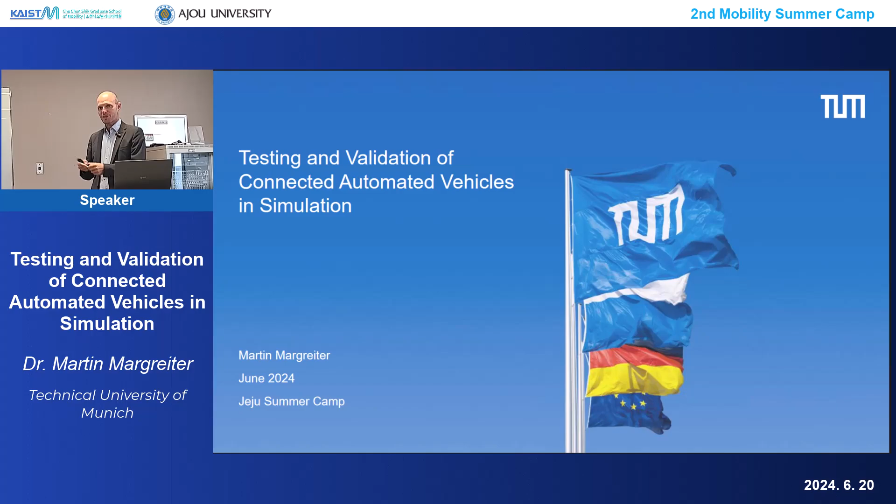And whenever you have questions, please always interrupt me. I know that Korean culture is more like being very serious about lectures and letting the professor talk. Please interrupt me whenever you need. Raise your hand or just say, Martin, please stop. Can you explain this once again? Or I have a question. That's not considered rude in Germany at all. We want to do it a little bit more interactive. So even if you're still tired from yesterday, just whenever you have some question, raise your hand or just interrupt me, please.

Okay, so first about myself. As you already have heard, my name is Martin. I'm from Germany. I'm heading a research group, or actually in the past heading several research groups, at the so-called Chair of Traffic Engineering and Control at the Technical University of Munich. We have a big research institute there with around 60 to 70 people, distributed into 3 different groups. 20 of the researchers are in my group, and my group at the moment has the name Test Fields and Simulations. That's why I'm here, to talk about simulation and test fields and explain to you what we do there.

And I also have founded a small startup, so this also fits a little bit to this camp, since your focus is also maybe to innovate and think about a new startup idea which you can create either here in Korea or somewhere else. So I've done the same already 7 or 8 years ago, founding a startup which is mostly dealing with mobility innovation as well. So we do lots of consultancy for OEMs, meaning automotive industry mostly, but also for tier 1 suppliers, so Bosch and Continental, you might have heard about them. They supply a lot of equipment, systems, and products for cars and vehicles in general, and we also support them with our engineering and simulation skills.

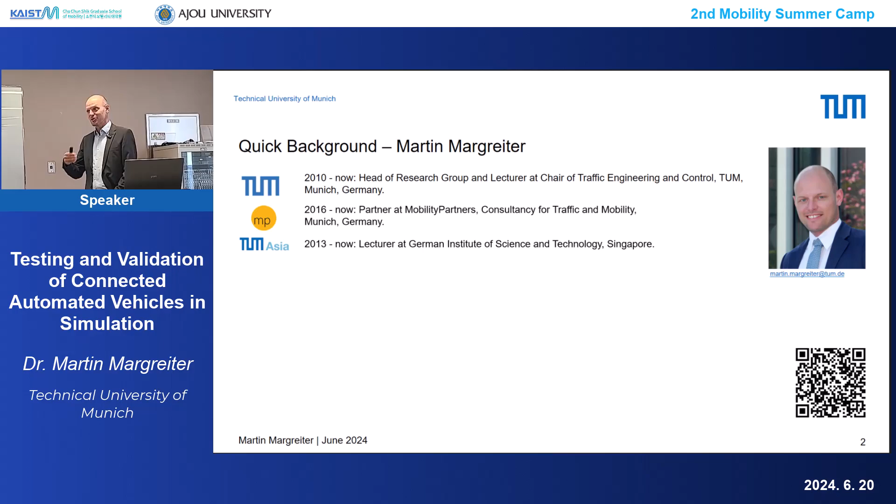Then also, for 11 or 12 years now, or the 12th time actually, I'm teaching in Singapore as well. Also some simulation classes there, mostly dealing with the simulation tool VisSim, which some of you might have heard about already. Who knows VisSim? Some, okay, the majority, great. So I'm teaching there how to use such microscopic traffic simulation for simulating traffic in Singapore.

Also, I'm part of PIARC, which is the World Road Association. Same like Jason, he's also now a member for Korea. I'm the delegate for Germany in one of the technical committees dealing with road network operation. And I was also for 2 to 3 years responsible for the European Commission, so that's like our government in Europe, to create for Central Europe an innovation hub. Which is maybe a little bit similar to what I think KAIST is doing here in this building. So also lectures, helping startups, funding startups, and also encouraging young people like you to found a startup in the mobility field to change the world to a better place, especially in the field of mobility and livable urban spaces.

Yes, I've been to the US also, same like Jason, to another university on a different coast.

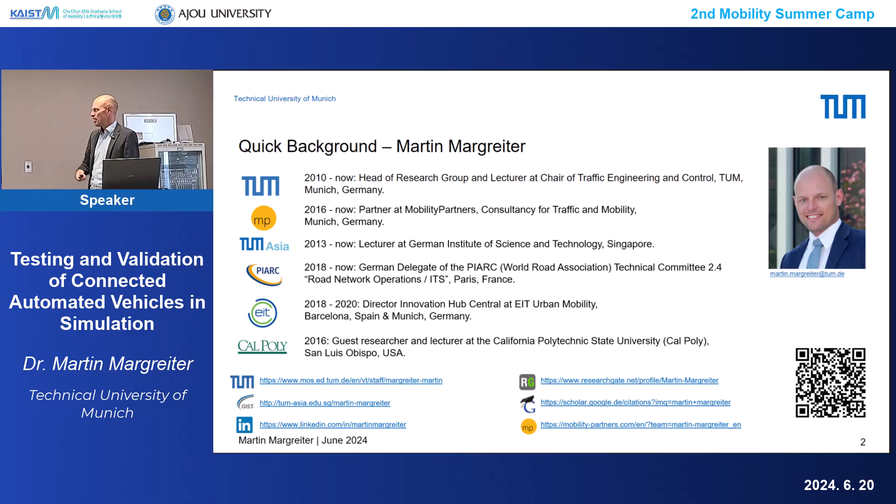All right, so what will I talk about? I will tell you what I will talk to you about today in more detail. First of all, I will do an introduction about the topic. So as you saw, the topic is about simulation, it's about connected automated vehicles, and it's about testing and validation. So I will try to tell you what these 3 elements exactly mean in the field of automated vehicles especially. And I will tell you why we actually need simulation to do that.

Then I will go a little bit deeper into the different details of simulation itself. So which scenarios are we talking about? So for example, urban scenarios, highway scenarios. We will talk about the different models which we are using. We'll talk about the coupling of the different models and different kinds of simulations. So we'll talk about driving simulators, for example, there, but also the coupling with, for example, digital twins of cities.

We will talk about verification versus validation. What's the difference and why do we need both of them? I will show you a little bit, since we are in the field of research, an outlook: what is the current state of research and what will happen in the next years as well with simulation.

And I will then have a short outlook into something which is very special about my research group, because we deal a lot with simulators. So simulators meaning humans, or people like you, sitting in some technical equipment, like a driving simulator, like a bicycle simulator, and we do some simulations with you as a human being part of a bigger simulation environment.

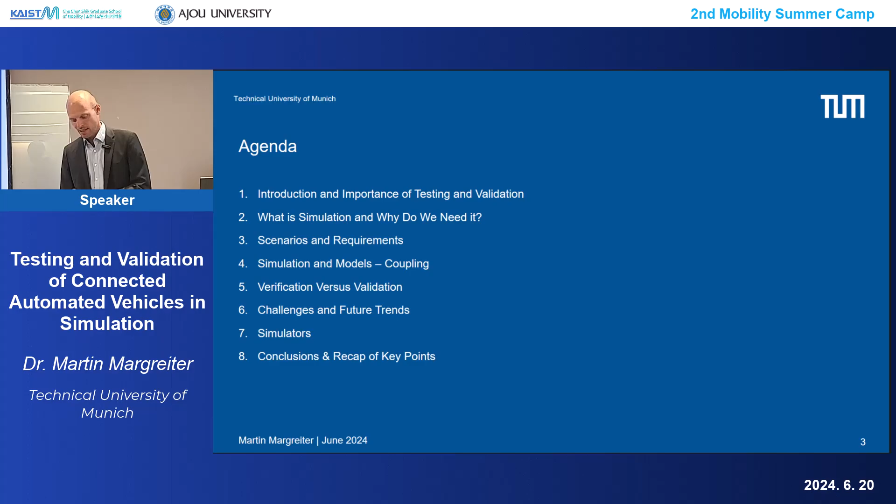So this is something my research group focused a lot on in the last years, and that's why I will show you some examples about the tools and systems and frameworks which we are using there. And at the end, we will finish with some conclusions. But first of all, I told you we want to define what the topic is actually about.

So Connected Automated Vehicles, CAV, that's the abbreviation. What does it stand for? So connected in this field mostly means it's connected to the environment. So it's connected to other vehicles. It's connected to the infrastructure, so traffic signals, maybe also a traffic management center, maybe also some cameras which were installed in the intersection or other sensors, to increase the safety by exchanging information with other participants in traffic.

So this typically happens via two different kinds of systems. The one is Wi-Fi. You all know that, consumer Wi-Fi. There's a special Wi-Fi for the automotive sector, which is called in Europe the ITS-G5. In US terms, it's very often referred to as DSRC, Dedicated Short Range Communication. So this is just a Wi-Fi which was optimized for the use in cars, which means that it can also operate while driving at higher speed, and it has longer ranges than the typical Wi-Fi you have in rooms or on your smartphone.

So we use this technology to enable the communication between different cars so that they can, for example, exchange information about hazards on the road, about maybe an emergency braking which they will activate in the next seconds or milliseconds. They can also exchange information about the traffic state, about maybe pedestrians or cyclists they have detected with their sensors, which other cars driving behind did not see yet, so exchanging safety-relevant information. Mostly, but it can also, of course, be used for infotainment or other information. So this is typically what is done nowadays.

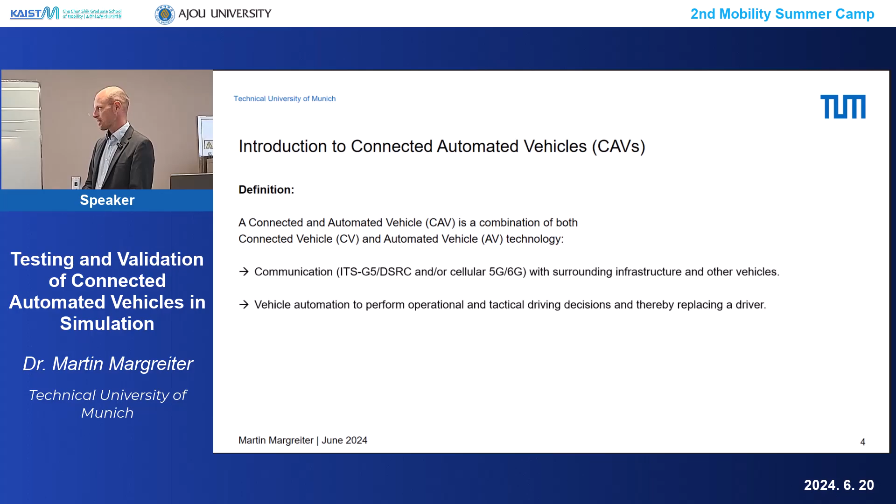And automation, of course, is a term which is used widely nowadays, especially in the field of traffic. Vehicle automation is mostly defined as the technology which is used to have a driverless car, simply spoken. So replacing the driver's activities in the operational, tactical, and strategic operation of a vehicle by algorithms which are fed with data from sensors and using a lot of computation power in the vehicle. So that's the definition of automation, as we call it here.

Very often the term autonomous vehicle is also used. We in research in Germany, or at least at TUM, try to avoid this term because autonomous, according to our definition, would mean no external information, no external influences. So fully autonomous without any interface to the outer world. And this is somehow neglecting the connected part here.

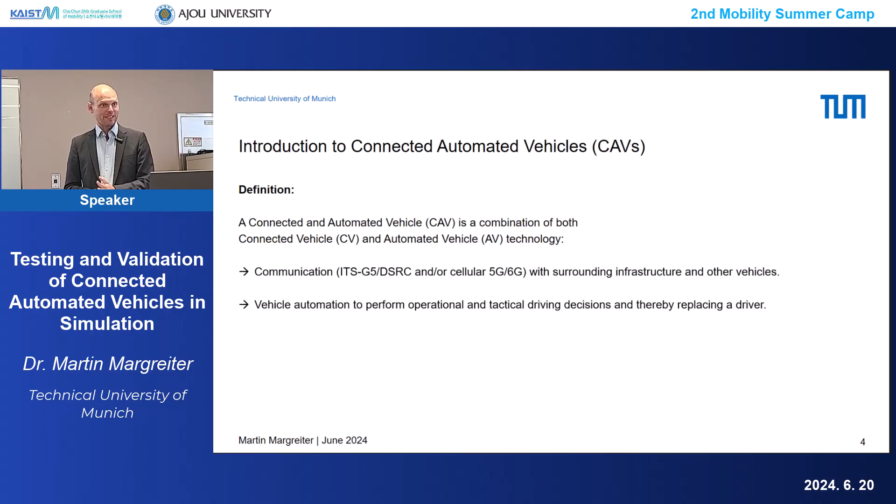Okay, so connected in our field means, again, receiving information from the environment, from the infrastructure, also from other vehicles. So according to our definition, this would not make an autonomous vehicle autonomous. Therefore, whenever we talk about driverless vehicles, we use the term automated vehicles, or fully automated, or highly automated, just for the definition of the terms here. So that's connected automated vehicles. We will talk about that today, and we will talk about some examples also. So I will show you later something which I've brought here on the left-hand side.

I think some of you might have joined us to Munich. Some here in the room might have seen our automated rickshaw, which is a 3-wheeled vehicle, very light vehicle. I'm actually not sure how much it weighs at the moment. It always depends on which computation power and sensors we install, but it's something like between 120 to 190 kilos. So very lightweight vehicle. We can actually carry it with 3 people, easily, or not easily, but we can carry it.

We also have nowadays on Munich streets, and especially in the north of Germany, also Moia operating. This is a brand from Volkswagen, from VW, which is operating such autonomous shuttle buses. We have automated trucks, we have automated people movers. So all these are examples for automated vehicles.

Who has ever driven an automated vehicle? Or who was ever passenger in an automated vehicle here? Not many. I'm not so sure. I actually wanted to check it yesterday. The Seoul metro is not automated? The metro in Seoul? Some of the metro lines. Yeah, I think all of you have driven automated vehicles already. I didn't put the metro here, but this is also an example for an automated vehicle. And the others, they have driven automated people movers like that, I guess, right? Like small shuttle buses. Yeah, that's a typical showcase nowadays.

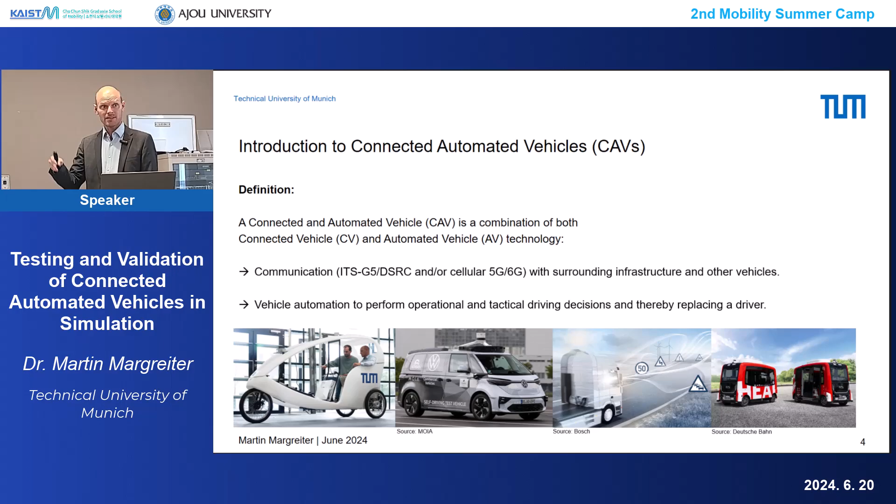So whenever we talk about automated vehicles, typically we think about automated cars. But of course, there's also automated trains, automated tram lines on the road, automated 3-wheeled vehicles, maybe automated small logistics robots or parcel delivery robots. Maybe also automated drones. I will not talk about that. But there's lots of kinds of automated vehicles, and especially when you think about public transport, metros, maybe also bigger buses in the future, we will see quite a step in automation there in the next years.

Therefore, since they will be part of our future sooner or later, it's very important that we test and validate them. So what does that actually mean? I brought you a lot of examples why we need to test connected and automated vehicles. So first of all, of course, safety. That's the main reason why we already do testing of regular manually driven vehicles, to test if they're safe for operation and safe for the humans using them, but also safe for the humans in the surrounding of these vehicles, pedestrians, for example. So that's a very important part also for the testing and validation of automated vehicles.

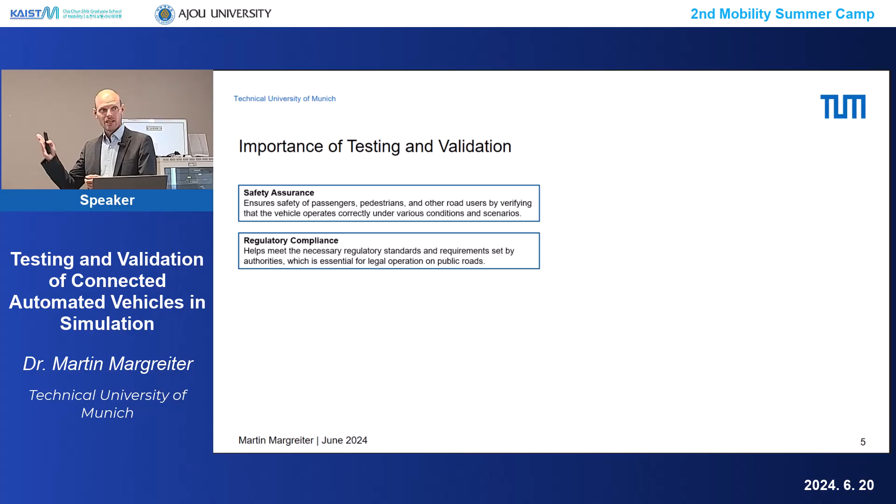Then, regulatory compliance. Lots of authorities worldwide have already established the first rules, the first laws, the first descriptions, technical specifications about how automated vehicles should be equipped and how they should operate. So to fulfill these regulatory frameworks, it's a very important part in our testing procedures that we test according to these frameworks.

And of course, error detection. In the development of such vehicles, we will definitely make lots of errors. It's probably hundreds of millions of lines of code which end up in such a vehicle. So you can imagine there's lots of potential error sources. Therefore, to detect and correct these errors during the development process of such vehicles or of such algorithms is a very important task.

Cybersecurity. You probably have seen some documentaries or read some news articles about automated vehicles or regular vehicles which got hacked. So cybersecurity is really an issue, because if the vehicle has the possibility to drive, to accelerate, to stop on its own, and this is all happening via algorithms, and these algorithms might be vulnerable to cyber attacks, this is a big risk for the passengers in such a vehicle. So this also plays an important role.

Interoperability. So we need to test and validate: are the vehicles actually able to work together? Can a Toyota and a Mercedes car actually work together on the road? Can they also, as I mentioned before, be connected, exchanging information about other vehicles in the surrounding, about hazards on the road? So they need to be able to communicate with each other. They also need to be able to communicate with the infrastructure in the city of Munich, but also on the island of Jeju. So they need to follow certain standards to work together as a whole. This is also a very important factor.

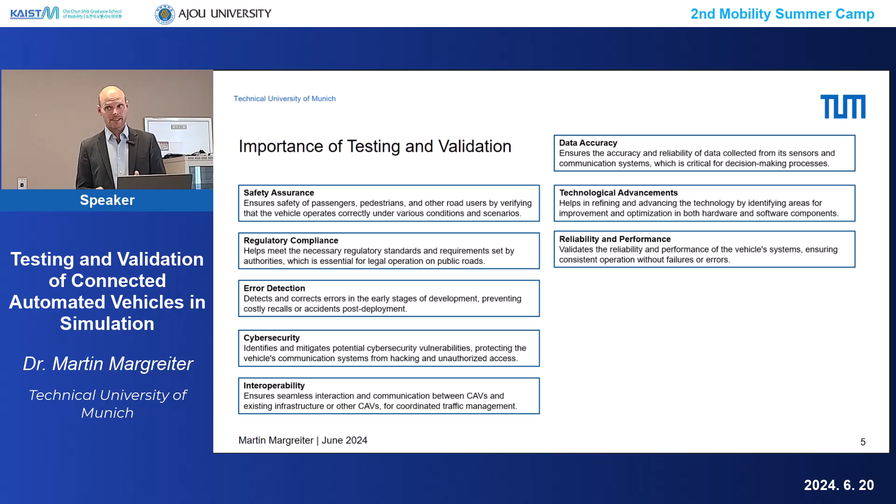That's also something which typically is not done by the car makers. They don't care so much about, is it really efficient in the overall system? Is the city mobility system getting better? That's the task of us researchers, for example, by microscopic traffic simulation, to validate if they really bring a positive impact on sustainability, so less fuel consumption, for example, but also efficiency of the transport network, less congestion, less travel times, and the same for safety, less accidents, less dangerous situations, or at least reducing the severity of an accident via smart systems.

Yes, I think this is all quite clear. Also edge cases we have to test. And more important at the end is consumer confidence. So I'm not so sure how it is here in Korea, but in Germany nowadays, when you talk about automated vehicles, the first thing you hear from the people who are not working in the field is, I don't trust that, it's not safe. Because we did have some examples.

I mean, you heard about crashes of automated vehicles, I guess, in the US, where they're already operating on the streets in bigger scales. People are getting injured. Some even have some fatalities involving automated vehicles. I mean, there are very few, especially in comparison to what we have with human involvement. But still, this has a big impact on the consumer confidence that this is a safe and good idea in the future to transform our mobility system towards this direction.

So therefore, to see if the consumer, so the passenger at the end, actually feels confident in using such a vehicle, this is also a very important part of testing and validation. Not just if he feels comfortable inside in terms of the environment in the vehicle and the nice seat and whatever, but if he feels safe. That's also very important, and we do this by showing the passengers in test fields and test beds, first of all, how it is to be driven in such a vehicle, but also how it is to interact with such a vehicle.

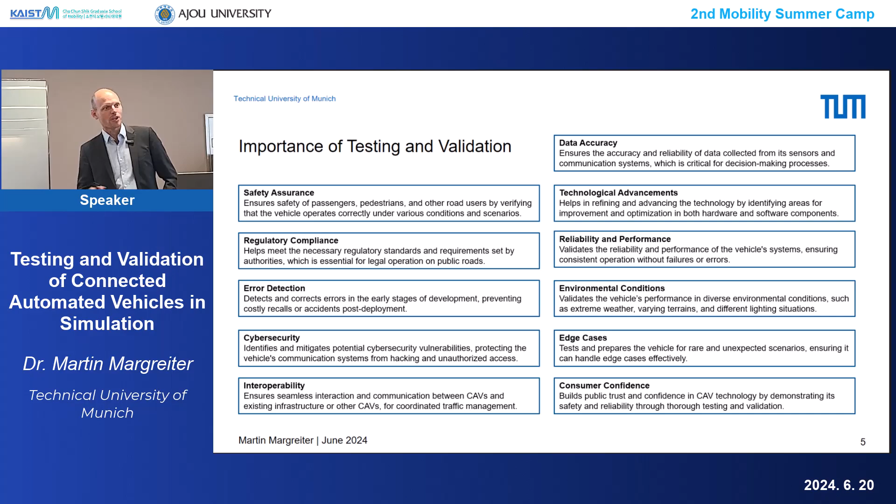So on the roads, if you're a pedestrian, can you really feel safe if you, for example, walk on a sidewalk or on a pedestrian crossing and the vehicle is suddenly approaching? So we show this to the people by bringing these vehicles on the road and testing them also on public roads. This I will talk to you about in the second lecture. So that was lots of theory. Let me explain to you how we typically do that in practice.

So typically what we do, we have 5 different areas where we look into how vehicles operate and what their effects are.

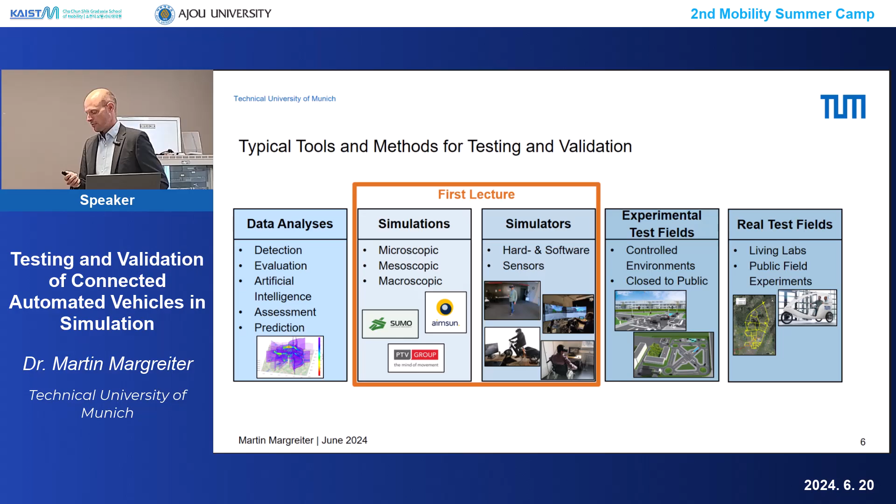And we will talk in the first lecture mostly about simulations and simulators. And then in the second lecture, which will follow afterwards, oops, sorry for that, we will talk about the right part of this process chain, where we will talk about how we actually bring those vehicles to the street.

But first of all, simulation. Why do we actually use simulation? This is valid not only for testing of automated vehicles, but in general, why does simulation make sense? First of all, as I've already told you, the more left we are on this process chain, it's easier, it's simpler, and it's cheaper. You already have equipment in front of you, your notebook, your laptop, where you can just do simulation. You download the software. Some of them are even open source and free. So it's very simple to do that.

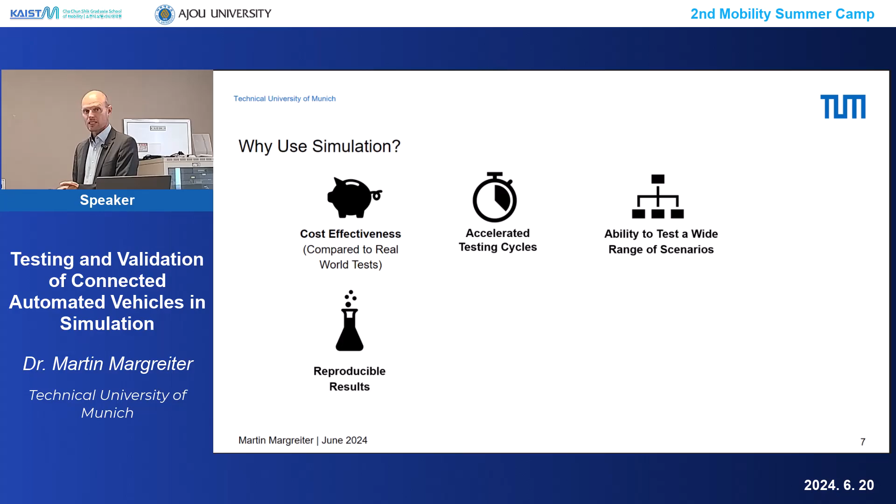And typically, we also do that to save time, to accelerate testing cycles; that's a big plus for simulations. And we use it to test a huge amount of scenarios, which I will show you later. We can have reproducible results, meaning that if we found some errors and want to try it again afterwards, we just simulate it again under the same environments, because in a simulation we control all the boundary conditions. This is a big plus for simulation. And we have valid conditions which we can verify with reality, for example, by collecting data.

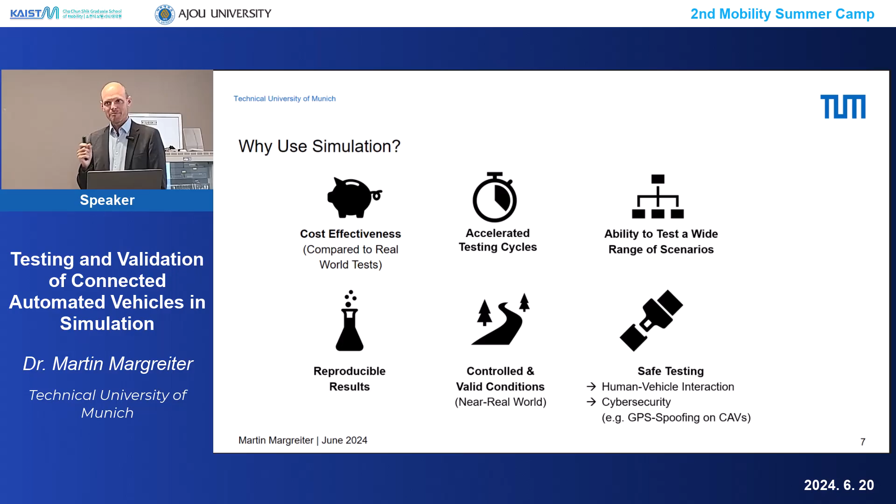And of course, especially when we talk about automated vehicles, we have a safe testing environment. If we have an accident, or even run over a pedestrian in simulation, well, that's bad for us because we have to invest more time, but it's not a problem in the end. If we would ever injure some person on the street with an automated vehicle, that would be really bad. So safe testing is, aside from cost effectiveness, probably the main reason why we use simulation nowadays.

And there are different kinds of simulations. Probably you've heard some of these names. For example, model in the loop. This means we have the model already developed and we test it in the simulation, so we run the model. The next step would be, for example, we have not just the model of an automated driving algorithm, but the real software. We got it from BMW, how they operate their vehicles, and we use this software in the loop. So we can test the real software on our computer. One more step is hardware in the loop.

So for example, we are using sensors, LiDAR sensors, real LiDAR sensors, which are connected then to our simulation. And for the LiDAR sensors, we fake the environment so that we see how the LiDAR sensor, the hardware, would actually work.

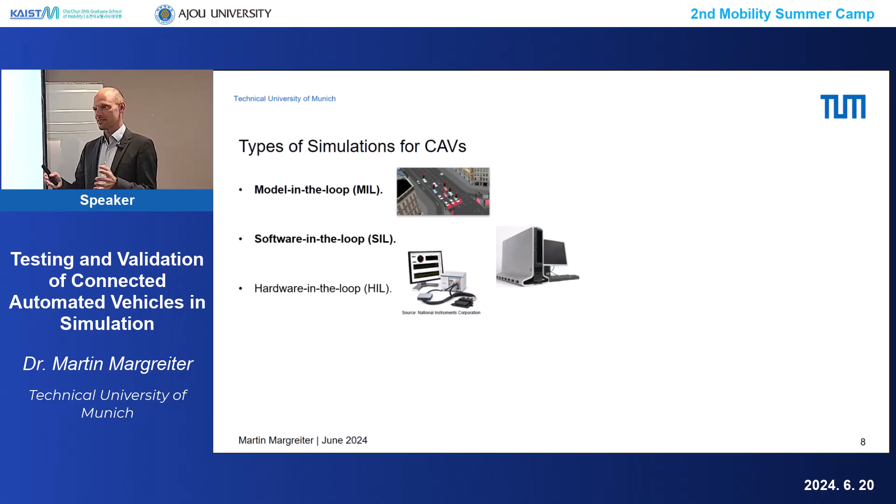Hardware in the loop is similar, for example, maybe for a driving simulator on a testing ground from the vehicle certification. So there also you have a vehicle which is driving on a test interface, but we really have the hardware operating like on a regular street, just in a testing facility. So this would be hardware in the loop.

And vehicle in the loop overall is then that the vehicle sensors, for example also the cameras, get a fake image in front of them on a screen. We bring a digital twin, for example, of the surroundings in front of the vehicle, so that the vehicle sensors think they are driving on a real test bed, but actually they are driving on such a vehicle stand.

And last but not least, something which was in the past very often called driver in the loop. Nowadays, since we talk also about automated vehicles, of course, it's not the driver anymore, so we are now trying to call this rather human in the loop. So somebody like you, a test person, coming to our lab and driving our simulators, this would be human in the loop testing. It's still a simulation, you are in a simulated world. You see on screens, for example, like here on a driving simulator, the virtual surroundings. And this is what we call human in the loop simulation.

So again, you see here from top to bottom the complexity increases when you go down, and of course also the costs and the time consumption of these simulation types increase when you go down. Yes, costs go up, and reality goes up. That's the big plus which you see here.

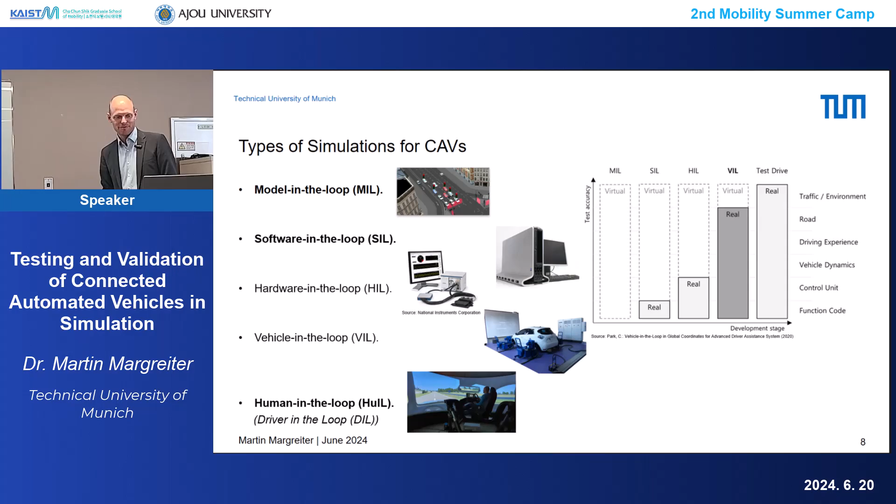So going into more detail, looking at the vehicle surroundings, the sensors, the algorithms. Typically Unity 3D, which is actually a game engine, is used quite a lot. CARLA, PreScan, ROS. So lots of tools there, and there are many more tools available on the market.

The domains in this field are really merging together. You will see we use game engines, we use software from computer science, we use lots of AI in our software nowadays, machine learning algorithms. So the domains are really merging together, and it's quite difficult to show you a chart of all the software used in this field, because it's changing rapidly every day.

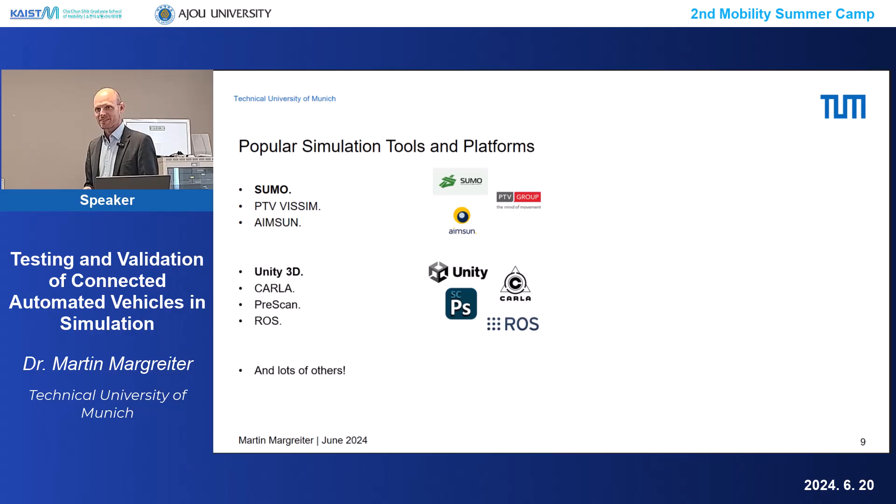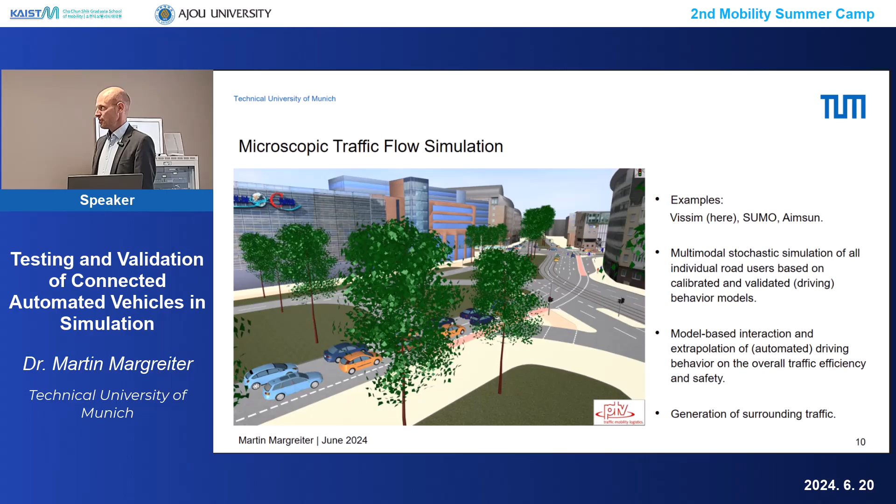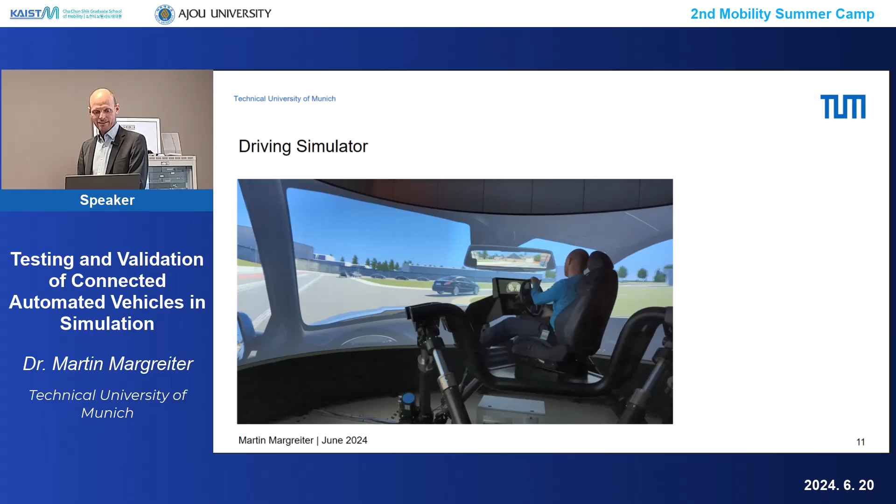If you go one step more detailed, that's what we call a driving simulator. A driving simulator means a human in the loop, somebody like you. I think this is even a video of me driving in a driving simulator, doing some illegal overtaking in the city. So this is a fully movable cabin where you drive a real vehicle, so the software is also from a real vehicle, in a simulated environment.

So these are the different kinds of worlds, I would say, which we have in the field of traffic and vehicle simulation. And you already see that nowadays they are very much overlapping, so it's not easy anymore to differentiate between them, because very often such simulations can also include many other vehicles. We can also have a driving simulator integrated in such a simulation, so you actually drive this vehicle in this simulation tool. So they become closer to each other, and the systems really are interoperable now.

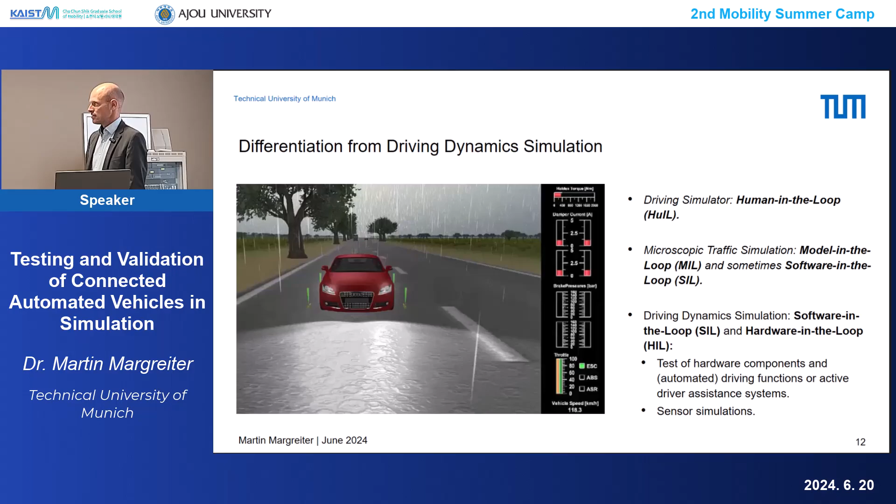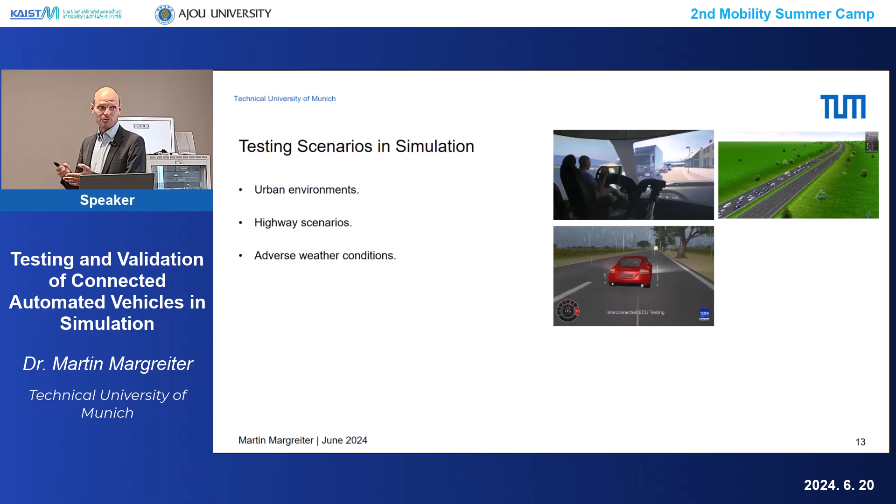So, here we go. And I already mentioned before, typically we test in lots of different scenarios. So for example, urban environments, highway scenarios, so freeways where we do have higher speeds and hopefully no pedestrians, no cyclists. We test adverse weather conditions like I showed you in the video before. And we also simulate complex traffic situations.

So for example, situations like construction sites, which are not so easy to identify sometimes for vehicles, or traffic situations like here, where it looks quite unorganized and where automated vehicles might have quite some problems to operate in a safe and efficient way. And we also have lots of research nowadays on the interaction between vehicles and the surrounding vulnerable road users, which is cyclists and pedestrians mostly.

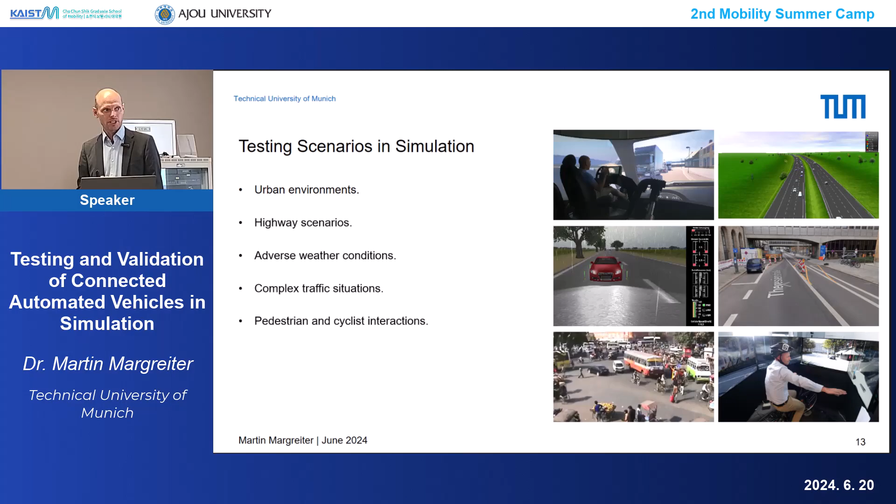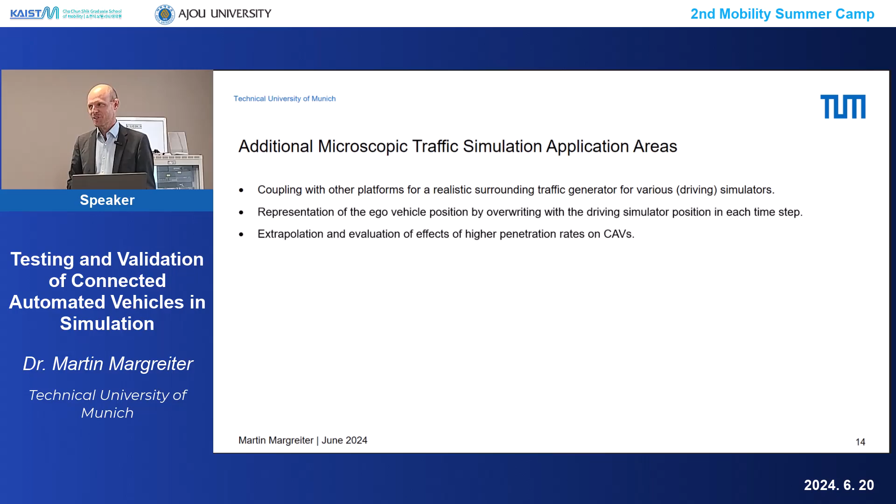So, what other areas do we have? I think I will just skip that a little bit because I think you have a lecture on simulation as well, right? I guess, so let me just skip that due to time reasons.

Okay. What is more important and what is really a main task in research at the moment is the 3D city models. So as you have seen before, all these simulations require that we know something about the environment where these simulations happen. The environment is typically our cities, or at least our transportation network. So therefore, our main task really is to bring these real world situations into our simulation models. This is, first of all, the first step you have to do, and second of all, typically also the most time-consuming step. So bringing the real world into some digital world, which is the surrounding afterwards for our simulation.

We typically call this a three-dimensional city model because nowadays the requirements of simulations are very often that we need the third dimension as well. So for microscopic traffic simulation, 2 dimensions, totally fine. For all the other simulations which I have shown you, the third dimension is a must. Because, for example, when you're driving in a driving simulator, you need to know where are obstacles I cannot look through, obstacles which are obstructing the view to other vehicles, to pedestrians and so on. So the third dimension is a must there.

And if you look into the field of automated driving, obstruction becomes even more important because the automated vehicle has to rely only on sensor data. LiDAR sensor, radar sensor, cameras, whatever. And those need not only the information about whether there is obstruction in front of them, but they need information about which material that is. Is it wood? Is it glass? Is it reflecting or not? Can I look through or not? So this is very important information for 3D city models to be implemented in simulation. And that requires a lot of work, you can imagine.

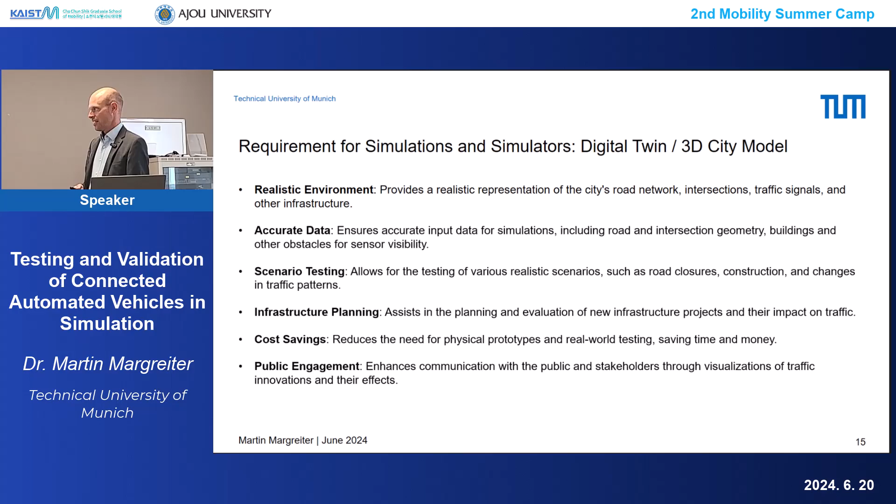And we very often also use the digital twins afterwards for public engagement, meaning that we will use those for visualization of our results, representing them in our digital twin, in our 3D city model, to the authorities, to the politicians, to the decision makers, but also to the public audience, not to encourage them, but to convince them that we are doing a good job, or that this change which we do is a good idea for the future of the mobility system.

So public engagement is quite important nowadays, to communicate not just the research results towards the public, but also to involve them at an early stage and consider their needs, consider their requirements, consider maybe what they're scared of. So this is a very important part nowadays of our research.

That's why very often we do the simulator studies, not with researchers or students, but we just invite regular people. Even my 65-year-old uncle was participating, for example, last time in a driving simulator study, just to involve the people and see what they are actually afraid of. Because you can imagine they have a different opinion on automated vehicles than we as researchers have. They have a different opinion on traffic, which is different than what you have as traffic engineers.

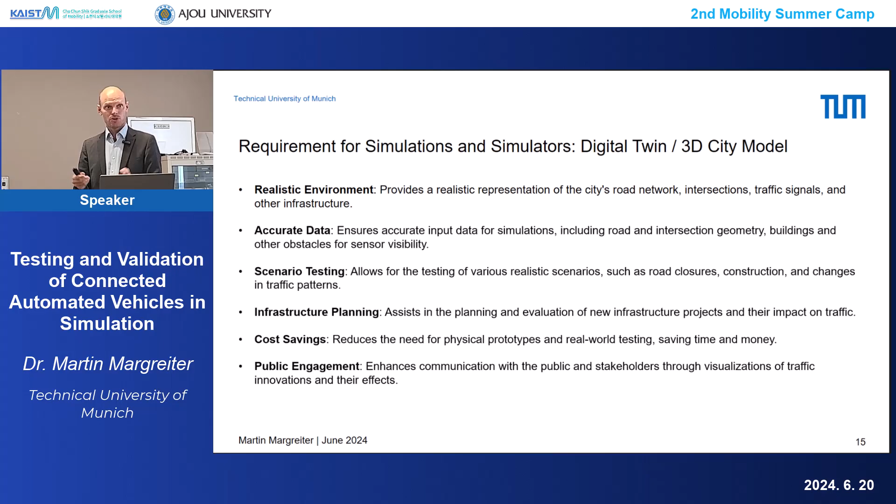Okay, let me just see the time. We make a break at 10:45, right? Okay, now let me just continue with that a little bit. Maybe just so that you don't be scared: my first part is a little bit longer, second part is shorter, but we make a break in the middle, okay? So the first part will also continue in the second 45 minutes.

So, simulations and models. I told you at the beginning, the domains grow together much more in the current time and in the future probably even more. That's why typically what we do, we couple the different domains. We couple the different models from different domains. We couple different simulators with simulations, with real-world testing. So this all grows together.

And typically what we have done in the past, also I think when Jason was at our institute, we were dealing with the traffic only. So we did microscopic traffic simulation. We were not dealing with vehicle technology. We were not dealing with pedestrians so much. A little bit with cyclists, but also that was a very small field. So we just dealt with car traffic on freeways and car traffic on urban roads. That's what we did. Nowadays, we have to look much more detailed in the field of vehicles.

You can imagine with all the vehicle advancement, not just in automated driving, but also the driver assistance systems which we have, with all the new kinds of vehicles, like rickshaws, people movers, small delivery robots on our street, it becomes much more important to understand what is actually happening on the vehicle side. How do they behave? Which algorithms are responsible for moving them to the left, to the right, accelerating, decelerating, and so on. So this is becoming very important in traffic engineering, to understand what the vehicle is doing and to use dynamic simulation to establish driving simulators.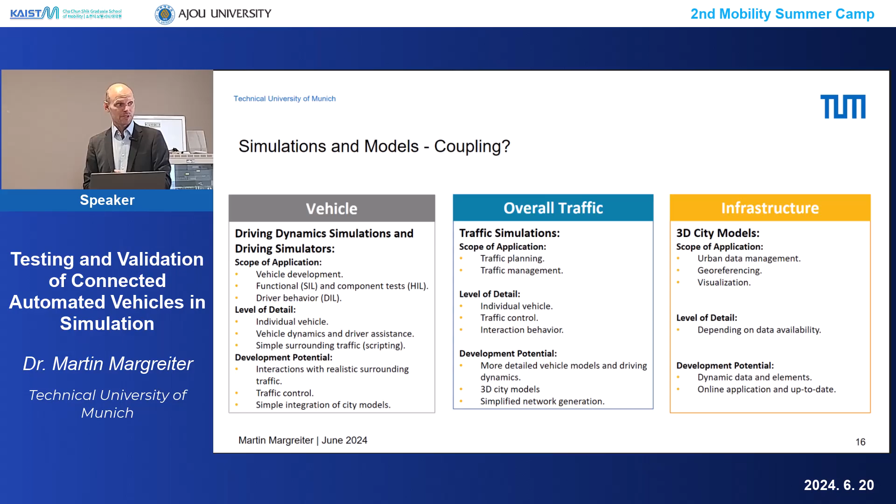And, as mentioned before already, three-dimensional city models. This is something which we have not dealt with in the past. When we imported something in our microscopic traffic simulation, it was a two-dimensional plan, sometimes even just a screenshot from Google Earth, which we then tried to replicate. Nowadays, the 3D city models become very important. So we also need to have the knowledge how to create them, or at least how to assist somebody in creating them, how to use them, and how to couple them all together. So coupling of these different domains really becomes our main task nowadays.

And I think this is my last slide and then we do the break. So the benefits of coupling are very important nowadays for us because it makes our simulations more realistic if you use vehicle behavior which is coming from much more detailed information. We make our dynamics simulation more realistic because we include the surrounding traffic into our vehicle dynamics simulation.

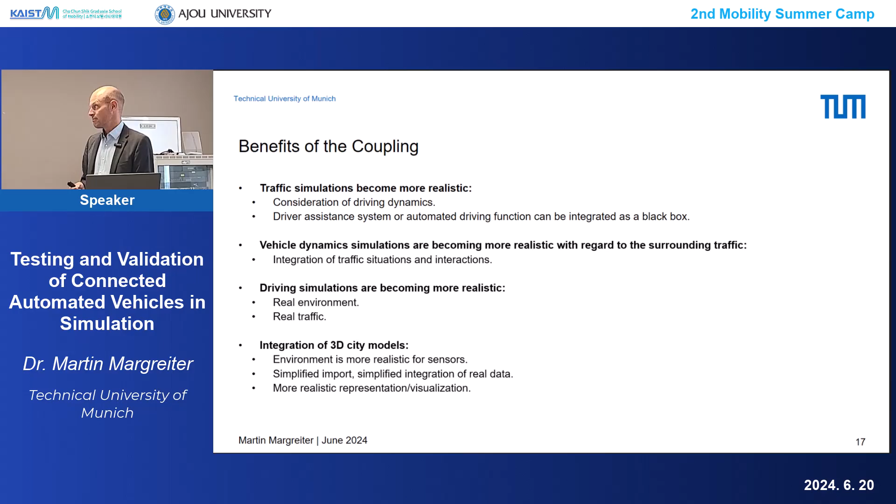In the past, vehicle dynamics simulation from automotives was always dealing with only one vehicle. There was maybe another vehicle driving in front, which was scripted, so it was defined how it turns, how it accelerates, and so on, but it was not a realistic behavior. So what we do now, we bring our 1,000 surrounding vehicles and pedestrians and cyclists from our microscopic simulation domain into the vehicle dynamics. So suddenly, they have a realistic environment where their one vehicle is operating. And also our driving simulations become more realistic because we use the 3D city models and integrate them into all our simulation environments.

So it's not only that it looks nicer, but also our vehicles can drive in a more realistic environment, and also our humans can drive in a more realistic driving simulator environment. So all these three domains which we now have put together really benefit from each other. And what I will talk about later, after the break, is that we require very complex interfaces between these three different domains.

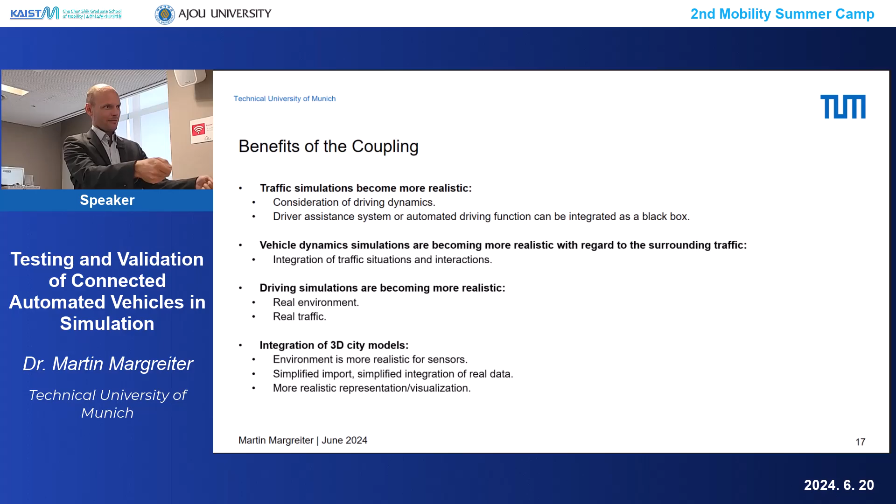So it depends a lot on the data availability you have, and it depends a lot also on which experiments you want to do. If we want to do driving simulator studies, sometimes it's not so important that the environment is super realistic. The people should focus on the traffic, and the other thing is just visualization. You don't really need that for your driving. But sometimes it's very important, of course, for sensor simulation of automated vehicles to have lots of details of the buildings. So it depends, case by case.

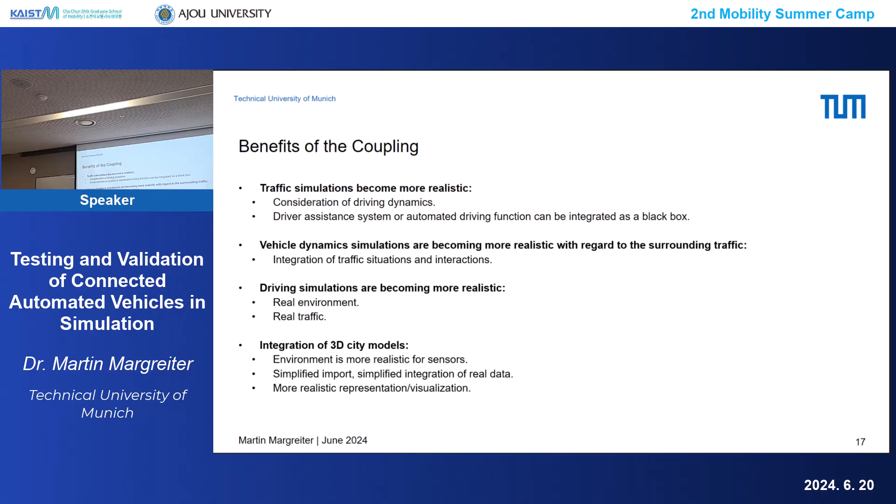So if the eyes are looking very fast left or right, and lots of health or medical symptoms, let's say, which we measure to evaluate if the person feels stressed or maybe scared. It's very difficult to differentiate between that, and we are actually not experts for that. So typically we have support from the medical departments, which help us evaluate and interpret the data, if this is a situation because they are cycling very fast on our simulator, or because they're stressed, scared, or panicking. At the end, we always get from them the information, this is stress level 80%. So that's what is done in such simulator studies.